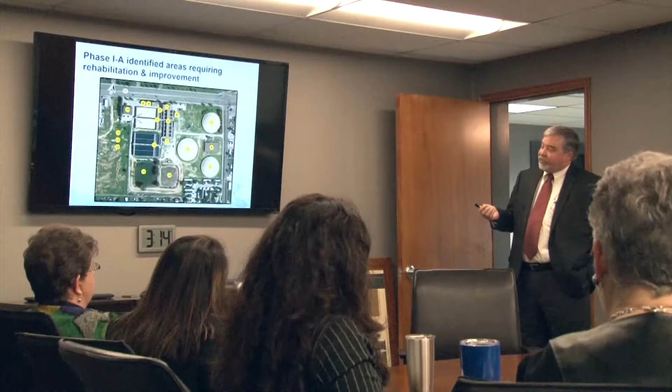So we took phase 1 and we evaluated the plant conditions. The issues that came out of this were not so significant that the plant is no good and you want to move off and not use it anymore or find a solution to replace the plant. But there were definite issues that we did run into, things that were very concerning.

The plant has a 55 MGD capacity, well above what our consumption rates have been. Some facilities and equipment are in good condition, others need improvements, as you would expect. The condition assessment determined needed improvements to sustain the water treatment plant, defined projects, estimated costs, and established priorities. Recommended improvements were grouped into 3 general categories: short-term, medium-term, and long-term.

The things that we found that were reaching their useful service life: process equipment, our flocculators. We replaced one flocculator, started before I got here, I think, while Matt was still here, and the other flocculators are in need of being replaced. We've had a filter completely fail on us. We have actuators and equipment that are getting to be a problem. So there's a lot of process equipment, pumps, and we're replacing a couple of pumps right now.

Electrical: our electrical system turned out to be in much worse condition than we had thought. When they opened up the cabinets and saw the back, what it was looking like on the bus bars and things like that, they were very concerned. And so our electrical system is a primary concern for us.

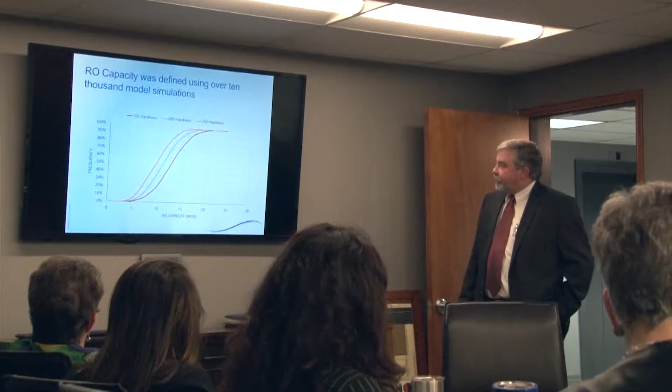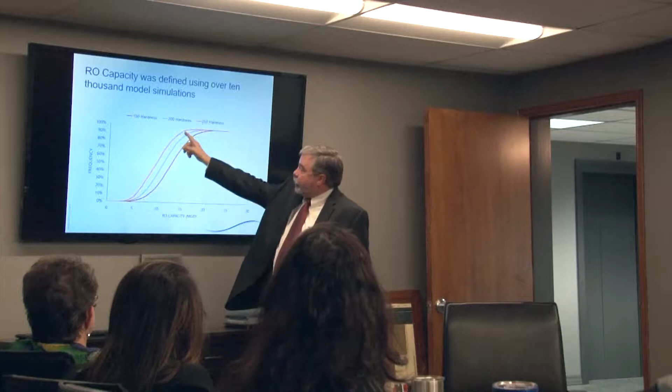Now, what this demonstrates is a graph that shows the RO capacity for our plant, and these are the hardness. The orange line is 250. The red line is 150 hardness. So as you're going this way, your water's getting better. Okay, you're making sure water's better quality.

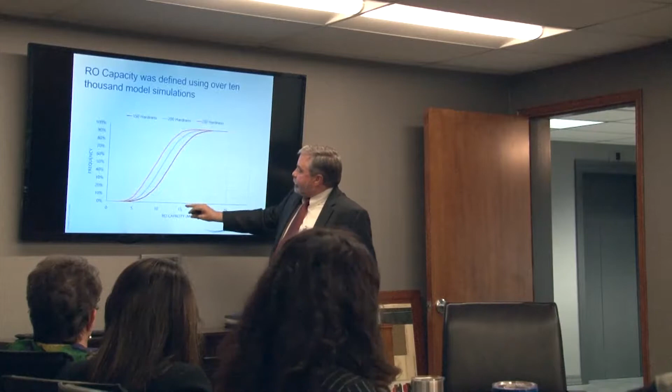This is the capacity. How big would the plant need to be based on our usage, and the frequency of how much of the time you would be at 150 or less. So if you were looking at this red line at 15 MGD, you're going to be below 150 75% of the time.

So in looking at that chart, if we had a plant that was about 18 MGD, we would hit 150 95% of the time. If we had a plant that was just right at 15, we would be hitting 250 about 95% of the time. And this is just indicating how we started looking at the size of the plant.

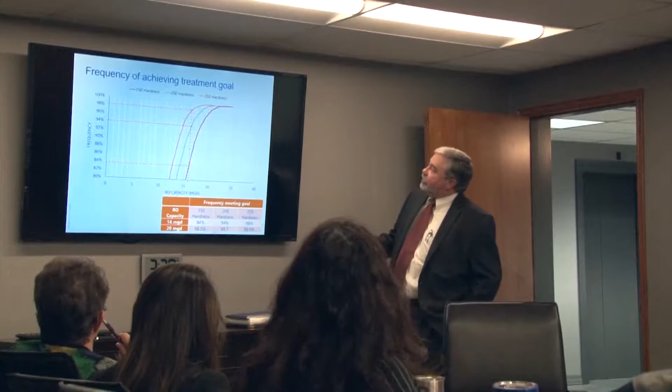So this is a frequency of actually achieving that treatment goal. So if we wanted to reach 150 98% of the time, we would be using a plant at about 20 MGD. And so a 16 MGD plant, which is the smallest size we would recommend for this process, would indicate that almost 84% of the time you would be at least below 150 on hardness, 94% of the time you'd be below 200, and 98% of the time you'd be below 250.

So from those studies, we moved into the pilot plant investigation. Pilot plant's really important for compliance. Make sure you're being compliant. TCEQ required it up until a few years ago. But if you're gonna spend this kind of money, you wanna make sure what you're gonna do is gonna be effective. And the pilot plant is what ensures that that process will work. So process insurance, in other words. Let's not go spend millions of dollars and not get what we thought. That would be the worst thing we could do.

So we completed it in April of 2018. Give me a date off, I guess. That's the future. The main objective is to confirm sizing, performance, and estimate operation and maintenance. Another objective is to select a robust system.

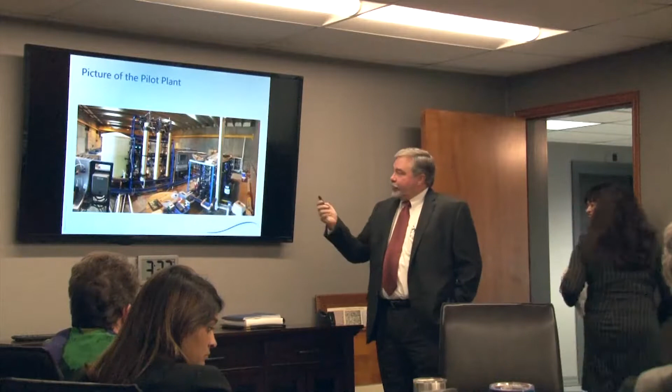And then those are the microfiltration units that we're testing. We used 3 different brands. We had 2 different brands of RO units so that we could be competitive in our process. This is talking about the manufacturers' ranges of fluxes. Flux is how efficient the water is, how fast you can feed the water across the units. It has to do with the capacity of the units.

So we did find out we had to have the MF/UF. It improved our efficiency. It also helped with high loading rates, and it allows for a more robust and flexible system. Again, MF/UF is micro and ultra filtration, right? Yes, sir. That's right. And the RO consistently produced high quality water, confirmed our capacity requirements and established design parameters. And we did see that we needed a higher antiscalant dosage with our water to have the process work well.

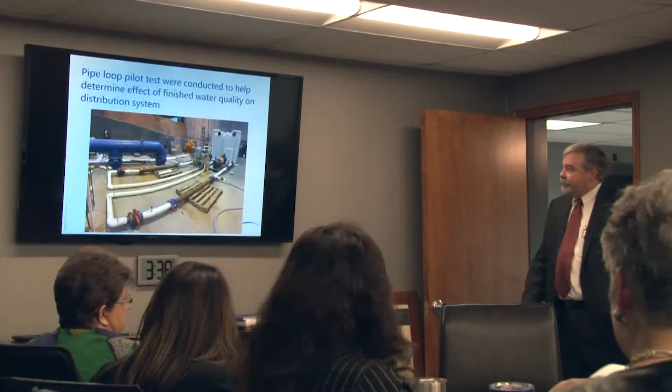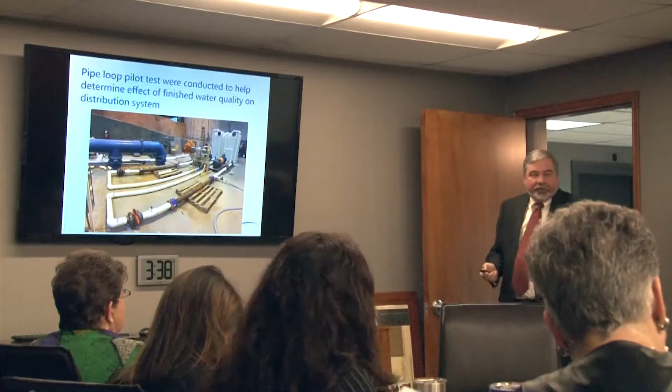This is a copy of the pipe loop testing. So we took actual pipe out of our system, put it in the test system, and ran the RO water through the process. We would also blend it back a little bit so it wasn't straight RO water, just like we would be trying to do at the end of the plant once we finish the process. The testing was favorable. And Tom, on those pipe sections, we just randomly cut them out of our system, right? Yes, sir.

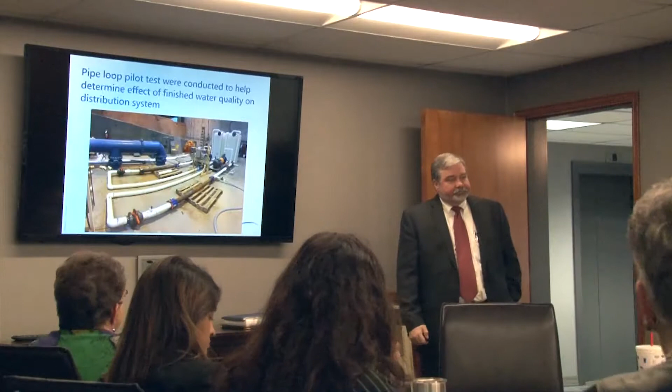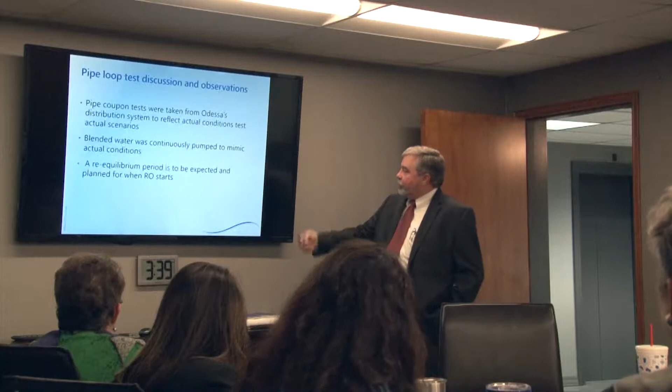So the coupon tests were run to reflect actual conditions. Blended water was continuously pumped through those during the test. That process went on for several months. A re-equilibrium period is to be expected. Whenever you make the change, we're gonna have probably some rusty water and some things like that occur. That's gonna happen. You just can't make it perfect, but it will dissipate over time. You flush the lines a little bit, get the water acclimated.

And how about the smell? Are we gonna be able to cut some of that smell out of the water? You shouldn't have much smell out of the water, even now. Oh, yes. You getting hydrogen sulfide? Oh, yeah. It's coming out of your drain, actually. Oh, okay. All right.

Older houses can have this. A lot of times people will smell hydrogen sulfide sewer gas in their house, right? And they'll call us, and part of the issue can be that your P-trap is not full or staying full. Some people will use bleach or something like that to clean that P-trap, and it will help for a while. If that doesn't help, in your house there's a vent pipe that goes up out of the roof. So all the gases, even coming from the sewer main, are intended to go up and out through that vent pipe.

And so the trap is to keep the gas from coming in the house. But if you're smelling it, even if your traps are full and you've cleaned them and that type of thing, your sewer pipe going up in your wall, the old gaskets have gone bad, and so the gas is leaking out of the pipe.

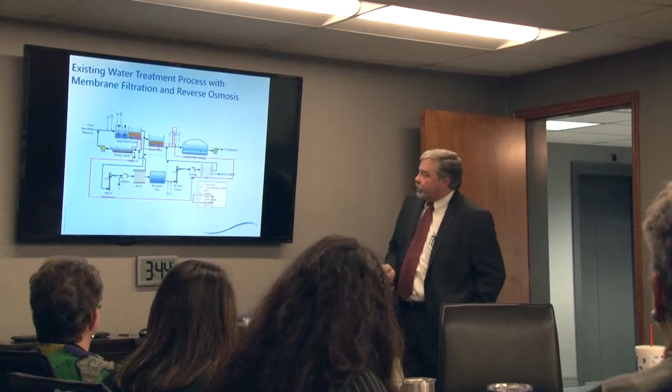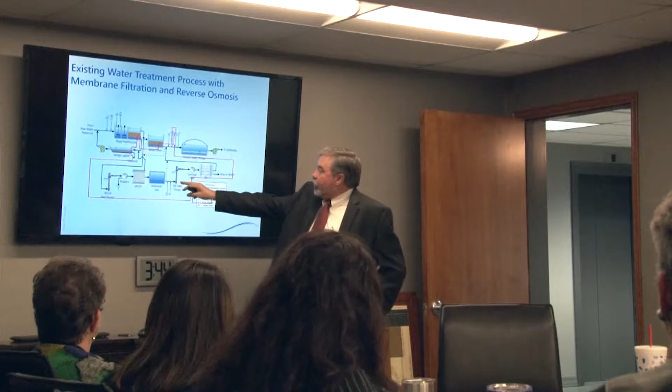So we went through the study. We've selected what process we're looking at. Coming in, this is our rapid mixes where we put the chemicals in, flocculation, sedimentation basins. This is our media filters. We're looking at dropping off of those media filters with another train that will feed through the microfiltration, ultrafiltration. There's a backwash tank for washing these units, and then going through the RO unit.

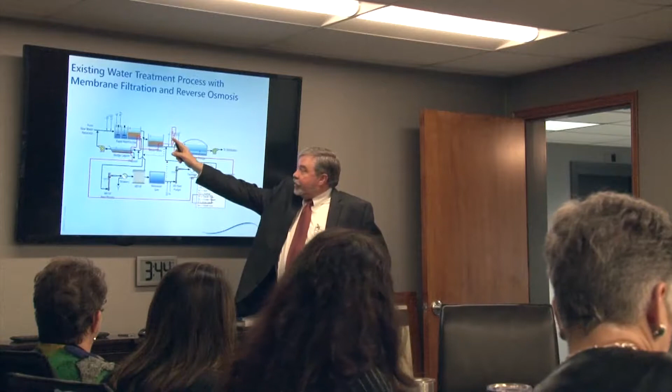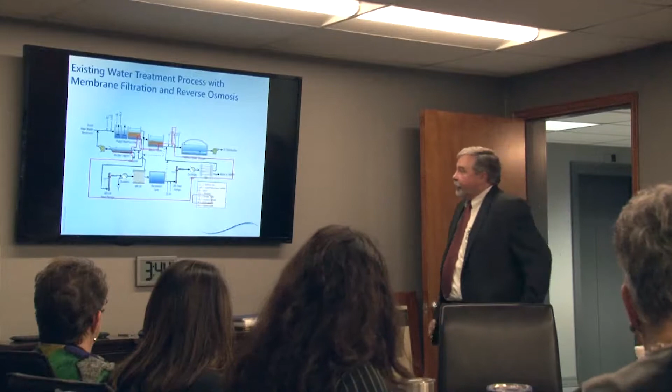Once it's RO'd, you blend it back with the water coming off the traditional filters. You hit it again with chlorine, ammonia. We'll be putting some carbon dioxide and products in to help with that pH adjustment to get it back to a water that's similar to what we have. And then it'll pump out to the distribution system. So, highlights for MF and UF, et cetera. Same thing that I just told you as far as that really goes.

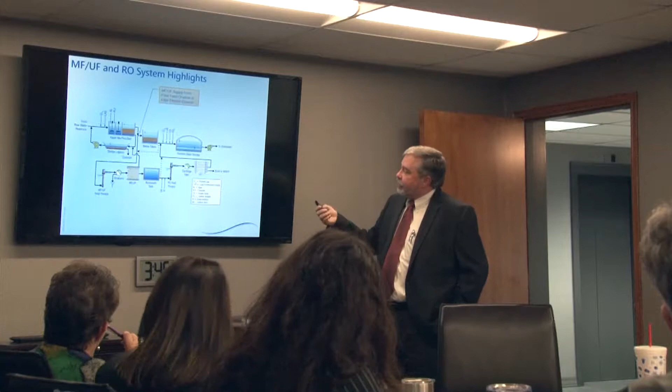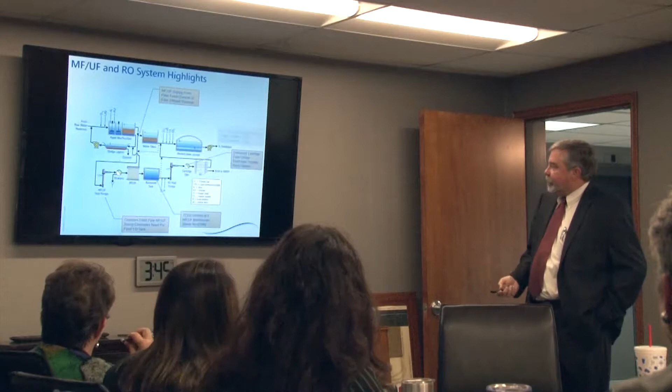The MF-UF supply from the filters feed channel or the filter effluent channel, before it goes to the filters actually. And constant feed flow through the MF-UF units and the RO units. The more consistent your flow is, the more efficient you can be. And dedicated cartridge filter and RO.

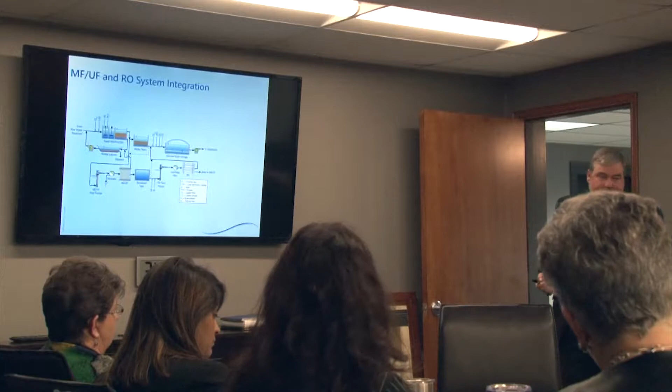If we have, say, a power outage, instead of paying for a generator large enough to run those RO units, you just let it shut down while you're out. So you can bypass the RO process when you need to. On that, when you're talking about a power outage, which makes perfect sense to me, is there a guideline on if the power's out for 30 minutes, or does the bypass occur immediately?

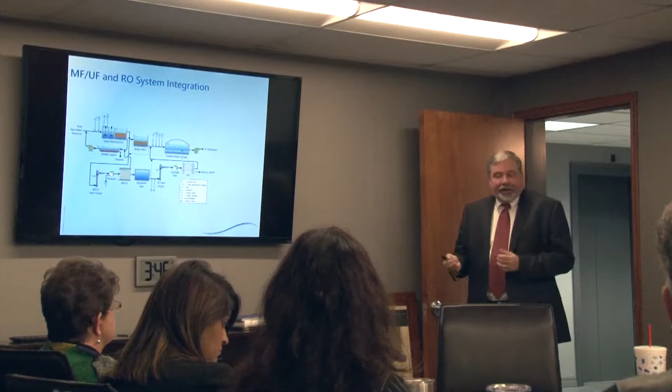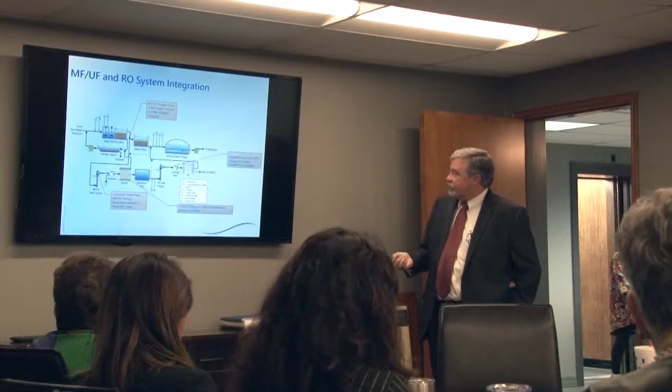No, there'll already be water working in the system, and we'll be able to make a transition. But once the power goes down, those pumps are gonna lose power right away. So, yeah, you're gonna pretty much shut the RO system out pretty quickly. Oh, okay. And then we'll make adjustments to bypass it and get around. So, these are just some of the steps of integration, similar to what we just saw.

And with that being said, with our population increasing, if it increases at the level that is anticipated, is this sufficient to take care of 170,000 people? Yeah. The 24 MGD will take us out for quite a few years, once we expand to that. You can actually go vertical, or we are looking at some other properties adjacent to us that may be available for expansion. The current proposal that we're working on is how many MGD? The minimum we want to do is 16 MGD, but the proposal we're working on is 20 right now.